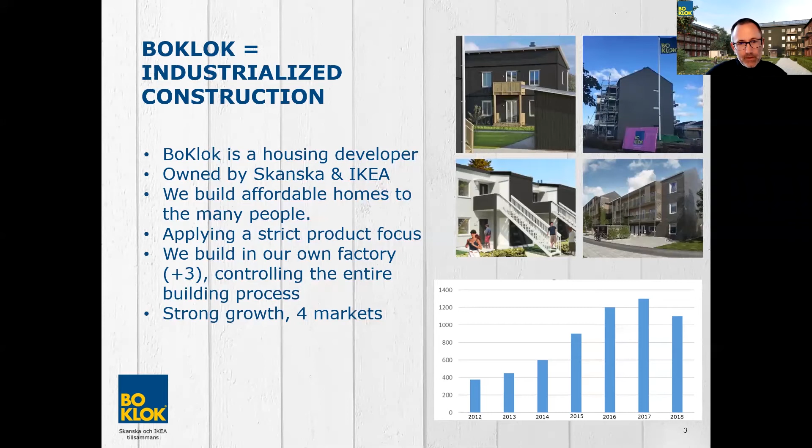So the vision for BoKlok is to build sustainable quality homes at a low price, and low price meaning for a very large customer segment, people with normal income.

And how was this done then? Yeah, well, already from the start, there was a realization from the founding team that this needed to be a concept, not a project-centered concept, but more of a product-oriented concept. So they went about this as a product development

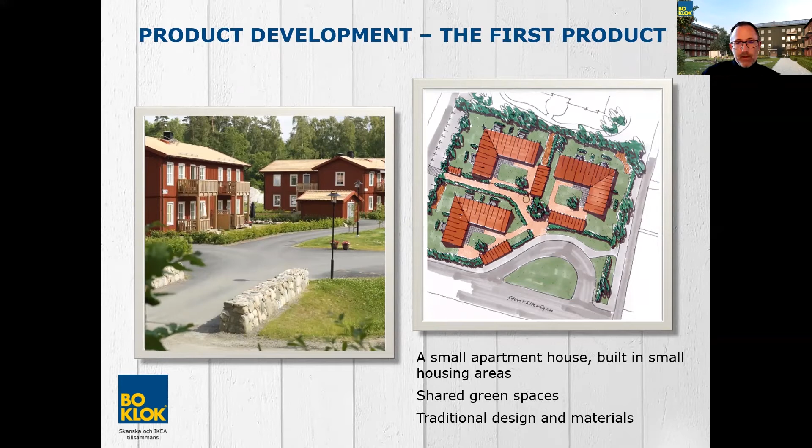Some room, of course, for project configuration, but not so much. So very much is standardized and defined in advance, and then combining a little for the project, but not so much, especially not compared to what we are used to in the housing industry, when it's completely project oriented. So very standardized in that sense. But you'll learn more about this matrix later on in the class, and then you can relate BoKlok to that. So some pictures showing the products that we have now, because what I showed you a couple of slides ago were the initial products.

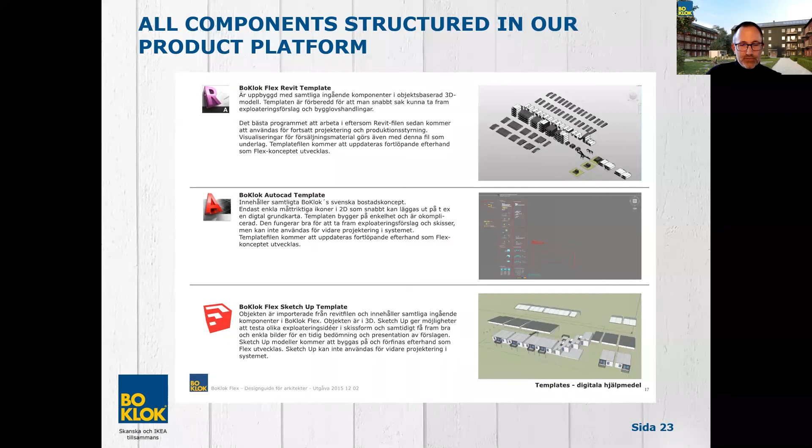And more from a technical point of view, we have all our components structured in our product platform, using different IT systems and tools to facilitate that, of course. And all the technical solutions are stored, all the different combinations, from the walls and floor elements and how they connect to the roofs. You could think that this is a simple building, only 4 stories.

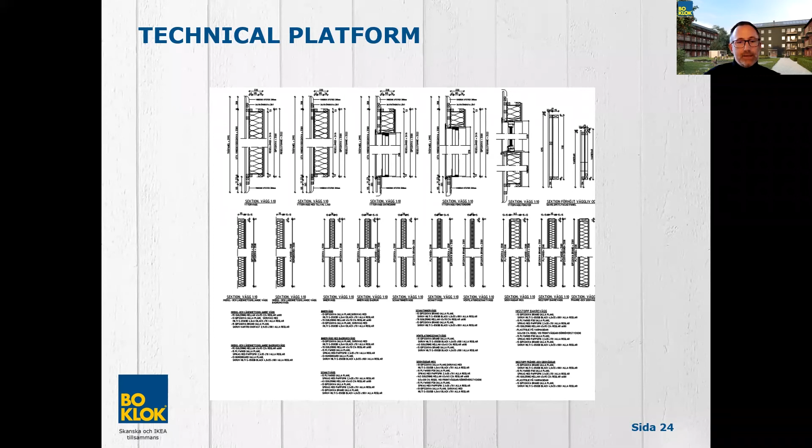Yes, but if you are to produce them in an industrialized way, and you really want to know everything about this, there are many combinations, there are many aspects to consider, and also when doing changes, it affects so much. So it's a big job to take care of a product platform, especially the technical aspects of it, of course. But the upsides are extreme because it allows us to really scale and do this in a smart and efficient way. So yes, as I said, all the different combinations.

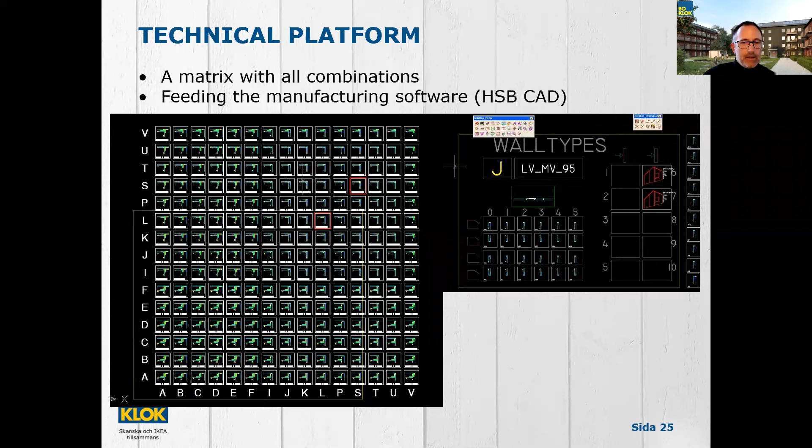This is a pretty early illustration of how we dealt with that, but this is sort of the basics for our database where we store all the different solutions and combinations for walls, floor elements, and so on. Can skip that.

Well, so now we've talked about the customer, and then the product development and the product platform, which is sort of the vehicle to carry all the solutions, and then moving into the production system. As I said, one of the prerequisites with BoKlok is to keep a very low price, and a low price of a product will also need a low cost. Otherwise, you won't be in business for very long.

So we wanted to have a very predictable production process with the use of standardization of the solutions, as I have talked about. And the production aspect of that is prefabrication. So controlling production in a factory setting was already from the start 25 years ago a prerequisite, because they realized that, okay, if we are going to build this at scale, we can't do it on construction sites where the prerequisites change all the time. So let's try to find as stable circumstances as possible.

And as it says here, no surprises and minimum exceptions. That's what we want from our processes. And of course, cost control. So we design for manufacture. We know what solutions, and we have a lot of discussions, of course, but we know how to design to be able to do it in a smart and efficient way. We have a lot of focus on procurement, of course, and then we can reduce waste in all its shapes in a true lean production manner. And that creates sort of a predictable cost situation for us.

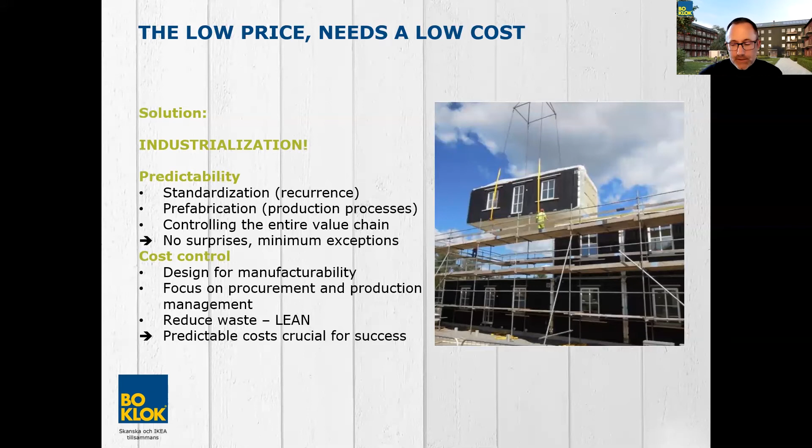And as I mentioned in the start also, since we control the whole value chain, we control the products, we control the logistics, and we control the production. Well, that can be translated into excellent opportunities for optimization. So our factory is structured only to build elements for BoKlok houses, meaning that we can optimize for that. We don't have to be able to change to serve different clients. Our factory serves one client, and that's BoKlok, and it's a very repetitive product that is being built, which has meant high level of optimization of the workflow, super standardized processes.

The operations are recurring every day, year out, year in, and that's of course extremely beneficial circumstances for continuous improvements. And the best example, I think, is when we built the first buildings that I showed you. We built them for almost 15 years. And still, after 15 years, we could bring out costs and time from the production of these small houses. Small, simple houses, but still after at least, I think 12 or almost 15 years, we could bring out cost and improve still after so long time. So that's pretty interesting, I think.

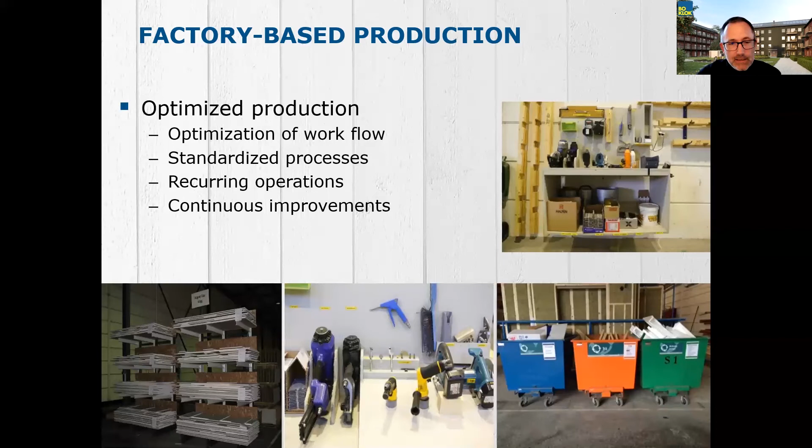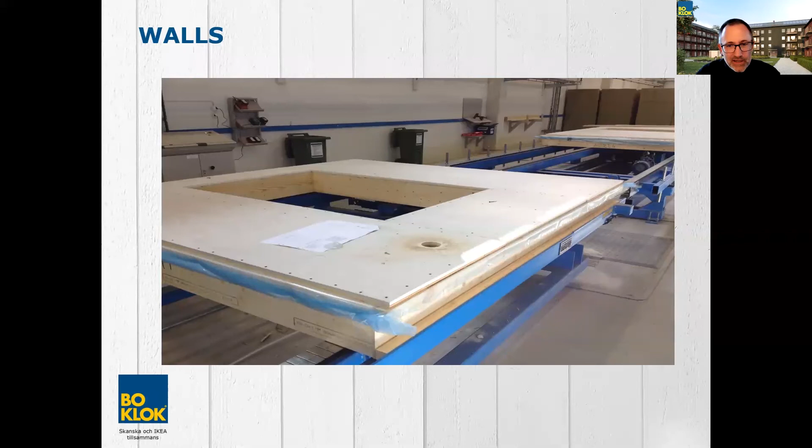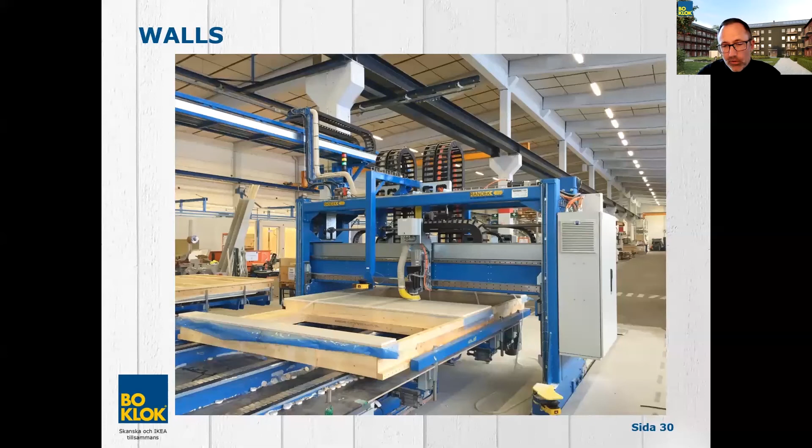So now I'll show you a bunch of pictures. Instead of showing a movie, I'll show you many photos to give you a sort of a feeling of how it's like in our factory. So starting with the wall production. Doesn't look very much like a building site here, because this is very industrialized. So this is a machine producing wall panels, almost completely automatic. So it puts together the frame, it puts on the boards, cutting holes, putting in the nails or screws as well. And we are actually in the middle of an extension or restructuring of our factory. So we are increasing the level of automation quite dramatically, and that'll be finished next year. So we will have many more machines similar to this one.

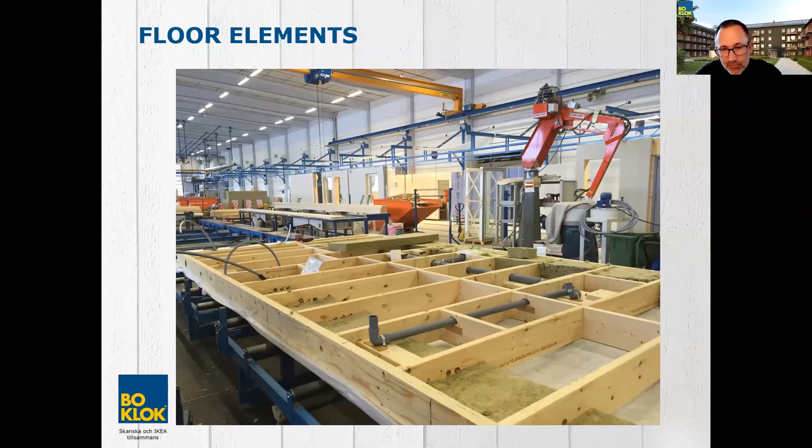Floor elements look like this, and as you can see, we build only in timber. So that is important for us because it's easy to work with. It has a low weight, and it's of course a very sustainable material as well. But here you can see how we prefabricate with all the piping, insulation, and electrical installations and stuff like that in the floor element already here from factory.

Here is one production line not yet being automated, but it's on its way, as I said. But these guys, they attach boards, plywood boards, and they have some really nice equipment to help them, and they are super fast. I can assure you that they put on these boards and the screws on this element, which is I think 3 × 9 meters. They do it in 10 minutes. So it's quite impressive. So we need to have some really good machines to compete with these guys.

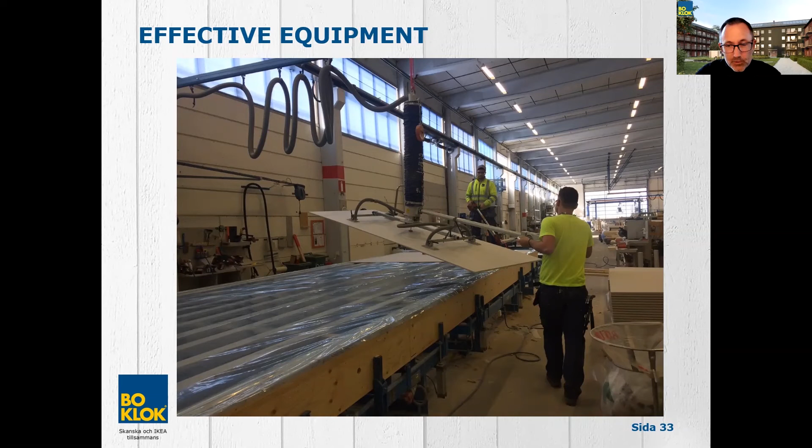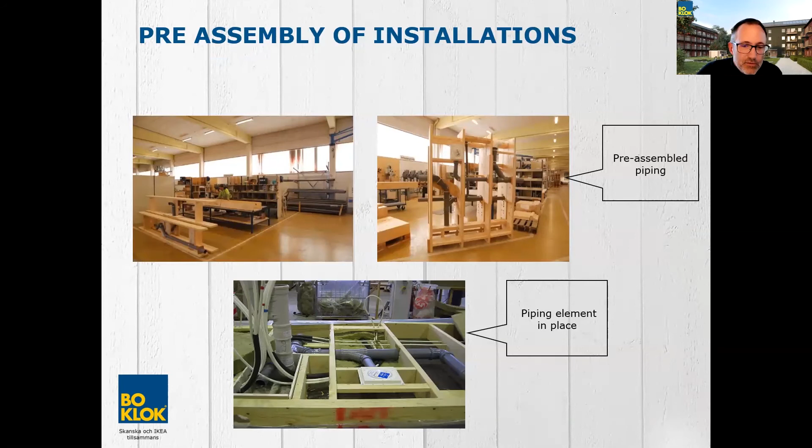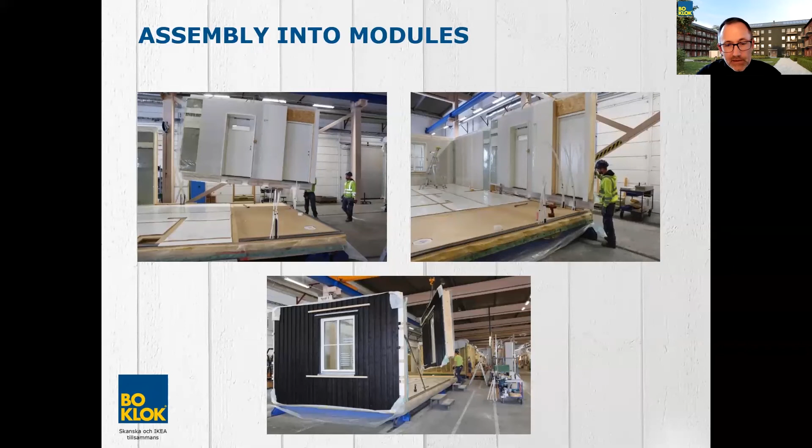We pre-assemble elements also on a side line to be able to put into the floor elements to keep the line moving fast. And we put the flooring on already when it's flat elements. And then we marry together the walls that we have produced and the floor and ceiling elements that we have produced into volumetric elements. And then we continue through the factory to complete the volumetric elements into almost completely finished rooms.

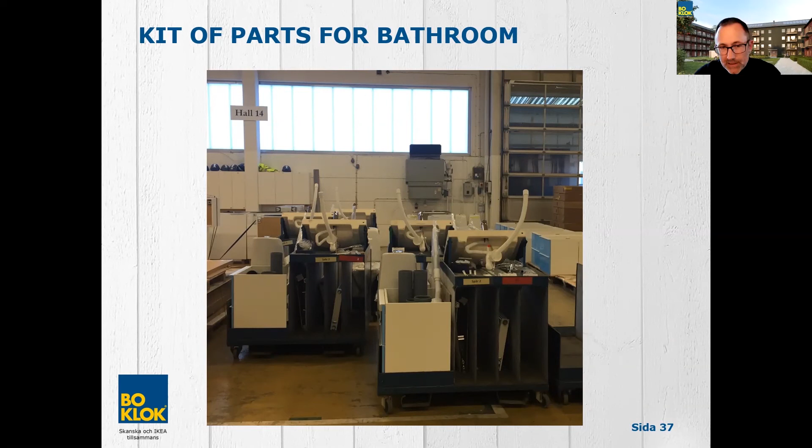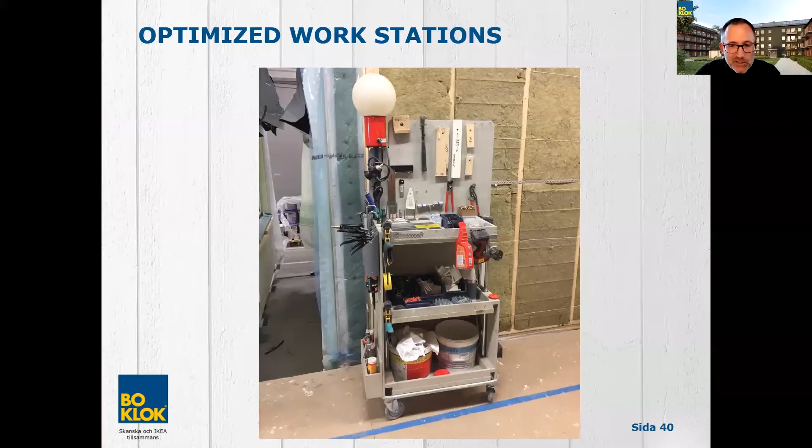And again, we can optimize to do that in a smart way. So that is done at the same workstation through the factory every time. And then we can optimize even the tool carts. We have only the tools and components needed to do those tasks. And again, bringing out cost, bringing out time, doing it in an efficient way.

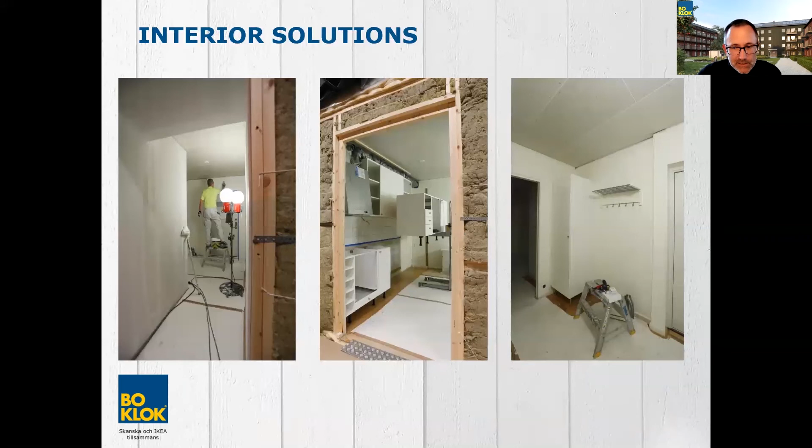Yep, as you can see, completing the kitchen with everything, and completing the hallway with the cabinets and the coat hangers and the painted walls, painted ceilings, the hardwood floor is there. So basically 85% of all work is done in the factory, and then the building site is mainly a final assembly station, you could say.

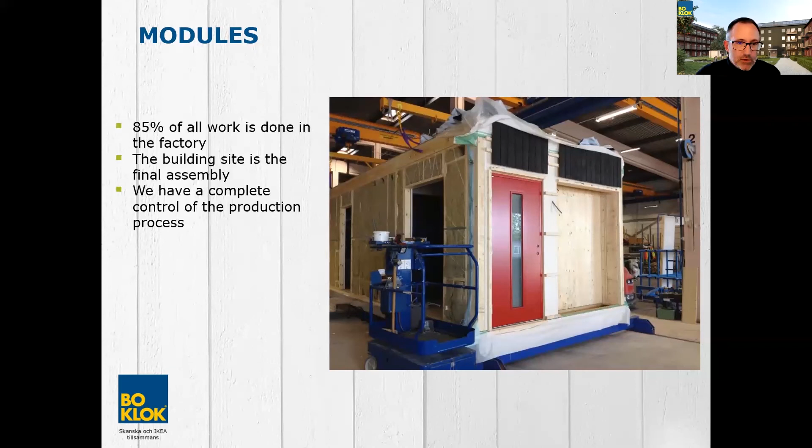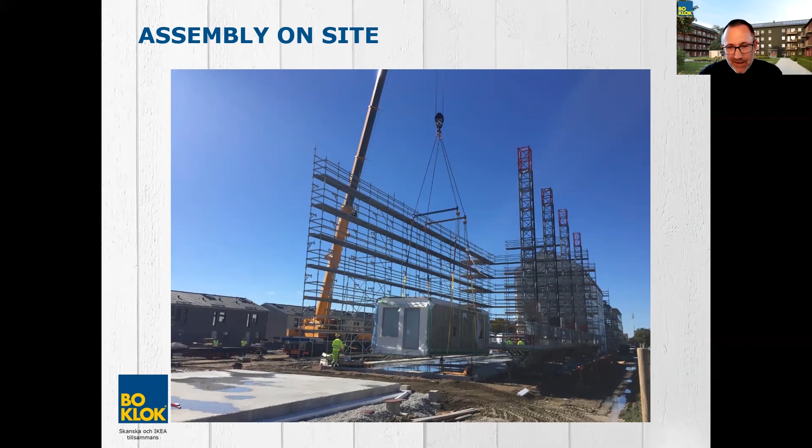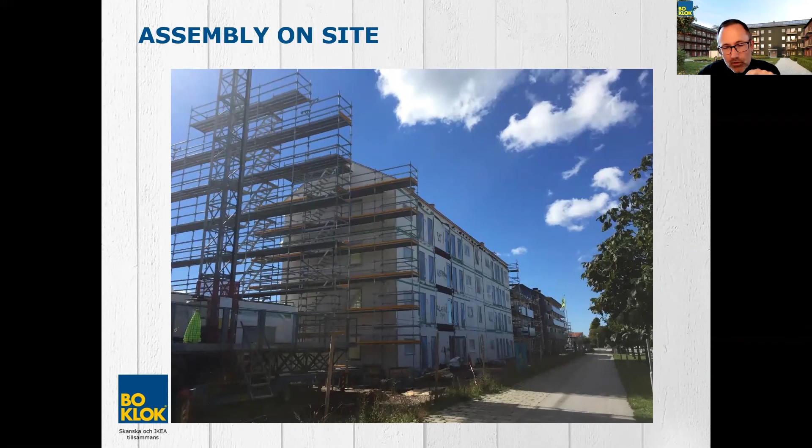And we can do that because we can control the production process. And then we ship the modules to the sites, and this is a good day to assemble modules. It's not always like that in Sweden, I can assure you. But this was a good day. This is a Monday morning, and this is the Thursday afternoon. So after 3-4 days, we have a complete building up with the roof on and it's sealed for weather.

And then a couple of more months, it's completed with facade and balconies, and the roof is complete, and so on. All the connections are done. So that's sort of the production process.

How are we on time, Daniel? So we still have 20 minutes left, but that includes the Q&A. So yeah. I think you have another 5 minutes for a lecture, and then we can do Q&A.

Yeah, exactly. Good. So we do it on a repetitive basis. Then it's a good move, of course, to understand. We have understood our customers, we think, but we also want feedback from them in order to improve even better, to make better products and make even better housing areas and so on. So we do customer surveys after every project. We get a lot of feedback that we can use for improvements.

And the amazing thing is that we have very, very satisfied customers. So we actually just a couple of weeks ago got the result from the National Customer Investigation, which is a standardized investigation done with all housing developers, housing companies actually. So we have been in the top three ranked housing companies for the last 5 years, and 3 times on top actually.

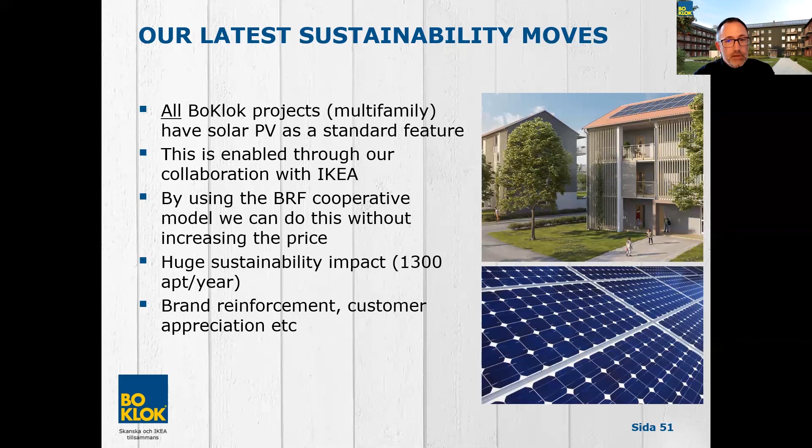Just to wrap this up, we also pay a lot of attention to sustainability. We have, since a couple of years back, put solar panels on all our multifamily projects. This could be done through our collaboration with IKEA, which has been super successful. So now we have made a very bold decision. We will do everything we can to be climate neutral by 2035.

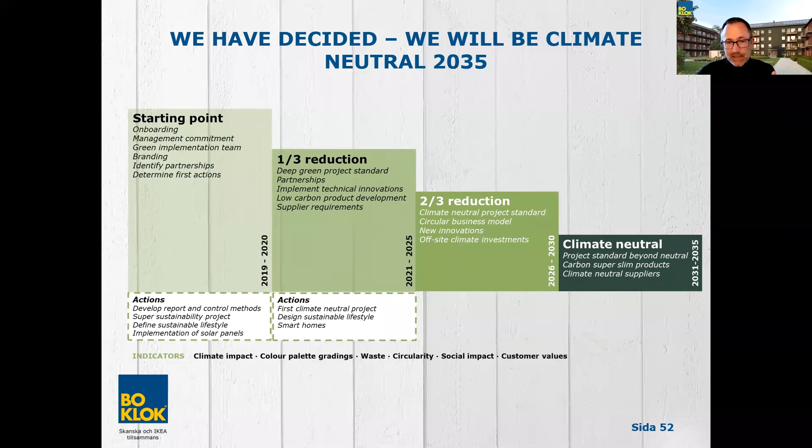And by being climate neutral, we mean our whole supply chain, all the way back to our suppliers and so on. So this is a super challenge, but that's something we need to do, and we want to do it. And the roadmap looks like this. So cutting our emissions by 1/3 every 5 years until the goal is achieved in 2035. So this is something that we put a lot of focus on, not least in terms of research and development.